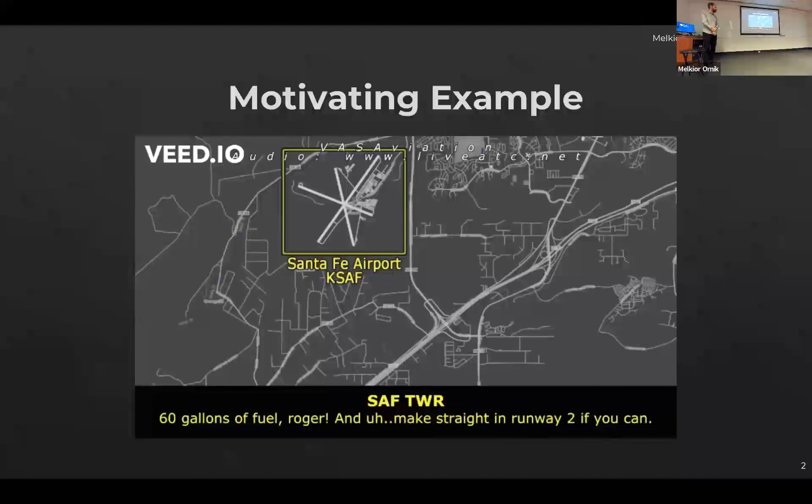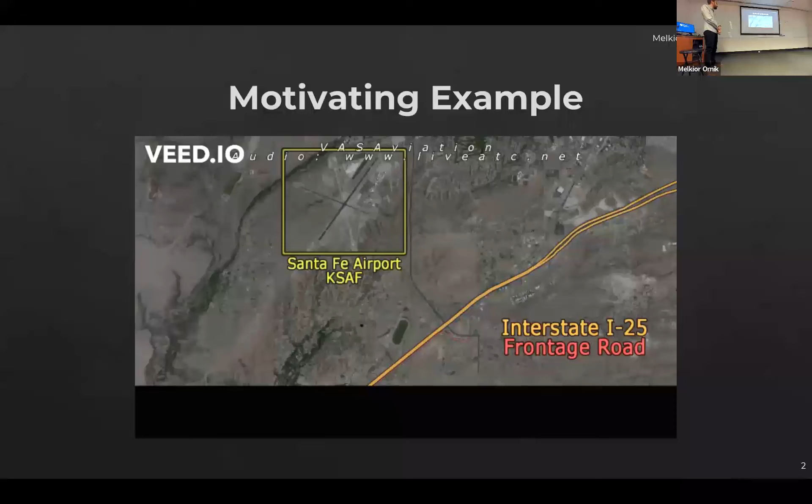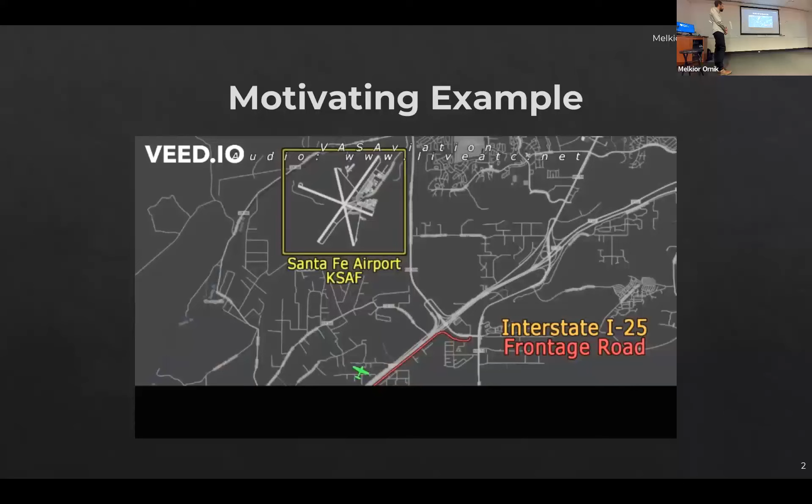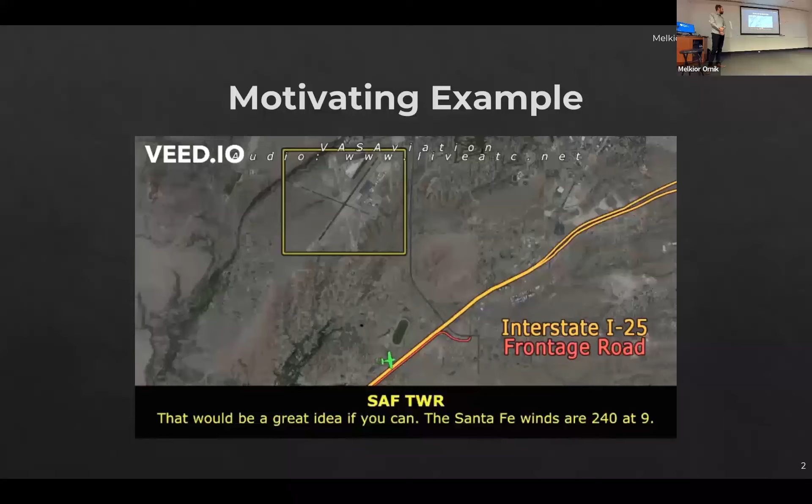6-8 Zulu, declare an emergency. Roger, you want to come in for runway 20? I don't know if we can get there. We just lost our engine power, something's happened. Wind is 230 at 10, you're clear to land any runway at Santa Fe, altimeter 3020. Can you give me some information? I'm 6 about south, I've got a big vibration going on, my prop's going bad here and I don't know what's going on. I've been at 8,500, I don't think I can clear, I don't think I can get to the runway. Make straight in for runway 2 if you can, but the wind is going to be a tailwind, 230 at 10. You can have any runway you want, clear to land. I don't know what's happened here, I have no oil pressure. Right on final for runway 2, you're 7 miles from the airport. I don't think I can get... I'm not going to make it. Let's see, where's our best place to go? I'm going to try to stay away from that ravine. Freeway? I-25 is in your vicinity, and maybe the frontage road off of I-25. There's 3025, I'm just not going to make that, I'm not going to make it. Can you tell me what's going on now? Try to land on the freeway here if I can. My engine, I have lost the engine, and I'll do the best I can here. Don't know if I should try to land on the freeway here or on the frontage road. I think I'll take the frontage road. That would be a great idea if you can. The Santa Fe winds are 240 at 9er. I've landed, I've landed.

So these last few seconds I put in just so you know the pilot is everyone's good. I promise you, throughout the talk I'll have a few more videos, and I promise no one died in the making of any of those videos. So you'll see it'll get weird - you'll need this caution.

So let's discuss what happened here. A pilot was planning to land at Santa Fe, and over time there seemed to be failures - one failure, and somehow these failures seem to be increasing. There are changes happening, and somewhere near the middle he decides he can't land at Santa Fe. He doesn't believe he can get there, so he starts looking for the next best option - he's like, okay, I'm going to try to stay away from this ravine. Then he chooses the interstate or the road next to the interstate, and manages to land there. So ultimately what we're talking about is he's trying to develop some sort of maximal understanding of his capabilities in the face of limited knowledge.

Some things broke - by the way, this was a tiny airplane, not a 737 - but some things broke. Some control surfaces were no longer operating, or in this case it was the engine. And he is trying to land safely.

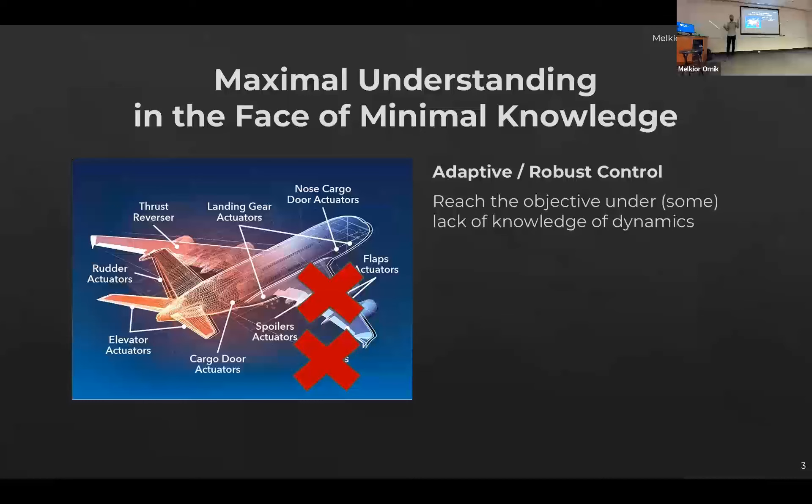This is not a new problem. If you look at the classical methods of adaptive control, of robust control, they try to figure out a control law that will reach the objective under some lack of knowledge of the system dynamics. But here's the thing - in this case, this was impossible, or at least the pilot believed it was impossible to reach this objective. This wasn't a question of can I figure out a control law that will allow me to land at Santa Fe, because there's a good chance there is no control law that will allow me to land at Santa Fe. I simply don't have the actuation capabilities to do so.

So the pilot intended to land at Santa Fe. Now this is no longer certain. So the pilot tried to figure out, okay, where do I think I definitely can land, possibly with the understanding that things might even be progressing towards getting worse over time. What are the guaranteed spots where I think I can definitely land? And so this is what the pilot did - he decided on what he figured was a reachable target, which was the frontage road, and then he planned how to get to that reachable target.

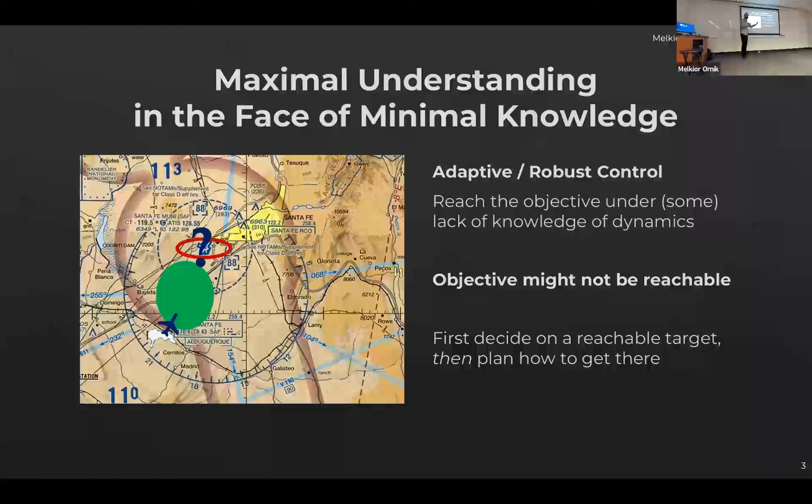This is the framework that I'm interested in developing - not just the framework of adaptation, but the framework of figuring out, faced with a partial lack of knowledge about dynamics, environment, whatever is going on, figuring out what are the things that I can guarantee I can complete, what are the missions that I definitely can pursue.

Mathematically, I think this abstract framework is applicable across domains. It could be in something like a network system, like a power grid, where some of your components fail and you want to see whether you can still ensure the performance of the overall system. Whether it's in a UAM, urban air mobility framework, where you might have some bad actors who are not following the particular rules or that suffer damage. We're right now working on a robotic example with a NASA grant with hardware called OWLAT, where we are playing with, hey, some parts of your robot fail - what are the capabilities that we can still complete? What are the missions that we can still complete given this failure and given our possible lack of knowledge about the failure?

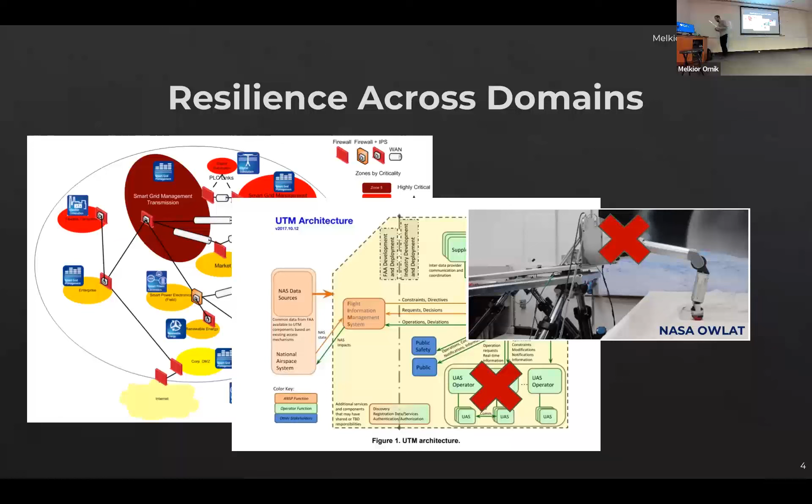So my entire talk is basically predicated on the claim that bad things, disasters, malfunctions, physical damage, hostile action will unavoidably occur for cyber-physical systems. No matter how much we try to protect these systems, eventually things will definitely go wrong. And once they go wrong, we might be interested in a few things.

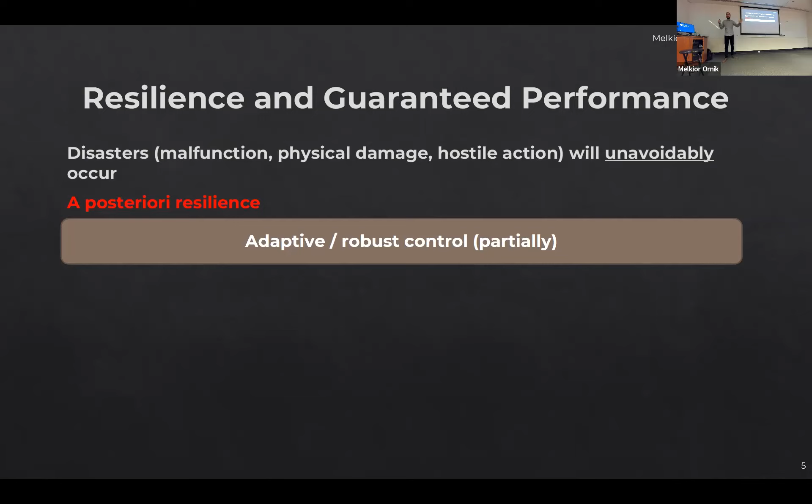The first question that I have is what I call a posteriori resilience. So when a disaster strikes, can I figure out a way to certifiably drive the system to complete its mission? This is not necessarily a new question - it's an interesting question, a classical question that is at least partially very well answered by adaptive control, by robust control. There's a bit of a question on certifiability of things - it depends on different methods, but this is something that's pretty standard.

I claim we should do more. I claim we should discuss a priori resilience. Can I design the system in such a way that after a wide class of adverse events, after a wide class of disasters, I know that I will be able to certifiably complete a wide class of missions? Now, the way I phrase this question, it's generally unlikely - if something happens to you that is so terrible that you can't really do anything, then yeah, you won't be able to complete any mission. So generally we can feel this is unlikely, but we're still willing to play with it.

And then the third thing, which the second thing leads us to, is guaranteed performance. So when a disaster strikes, can I, given my current partial, imperfect knowledge about what happened, determine what missions, what tasks the system is provably able to complete? So these are the things that are going to drive the rest of my talk.

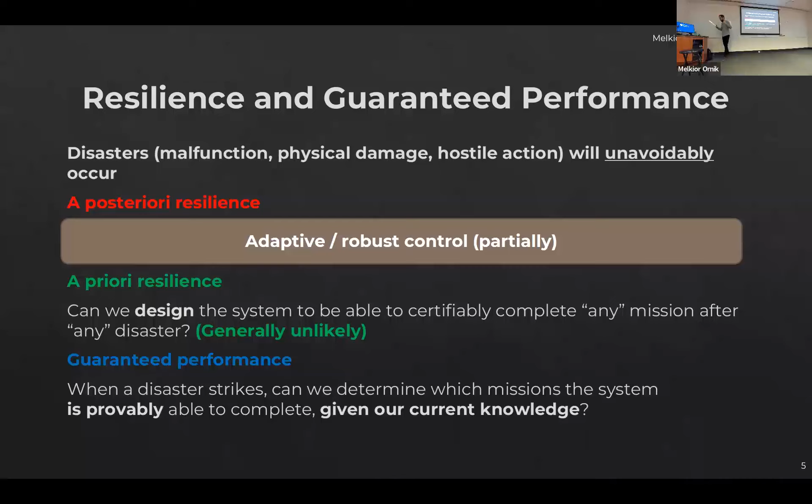And just to provide a mathematical framework of what I'm talking about - and of course all these things can be thought of in a variety of frameworks, discrete time, stochastic, whatever it is.

I'm going to keep to standard continuous time ODEs. I'm considering a system x dot equals f of x, u, where u is some sort of control input that lies in some set U, and x is the system state.

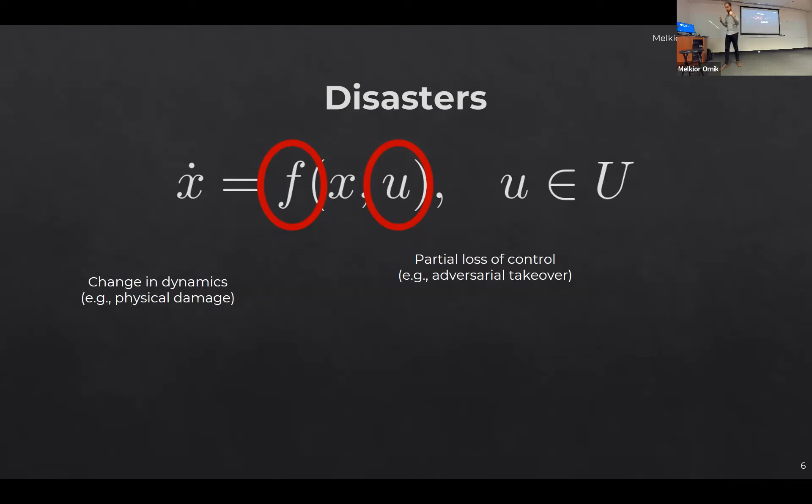I will be considering and possibly combining three classes of adverse events. One is change in dynamics: because of physical damage, my f is no longer f, it is something else. Class number two is partial loss of control. I used to have six actuators, and someone took over one of my actuators and might be plugging in bad inputs. This is a framework you could think of in terms of network control, if someone took over a part of your entire system, some of your components.

The third part I'll mention is actuator degradation. The dynamics are still the same, I still have control over my actuation capabilities, I just can't plug in some of the things I used to be able to plug in before.

So when we combine those three things, really this equation x dot equals f of x, u changes to x dot equals f hat. So f hat is the new dynamics, possibly partially unknown, of x, u, v, where u is now the part of the actuation capabilities that I still have control over, and v is the part that is possibly adversarial or random, call it whatever you want. And u and v together now live in this degraded set of possible inputs, which is U hat.

I'll be continuing with these kinds of models throughout the talk, and I'll start going from right to left, from seemingly less difficult cases to more difficult cases as I discuss these possible disasters.

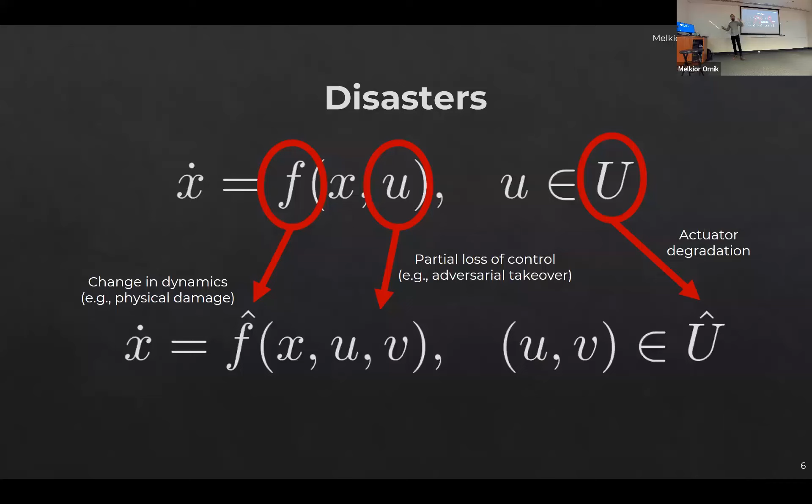So let's start with actuator degradation, and provide a motivation that's not to do with airplanes or things like that. I found this on a sailing forum where a person described exactly the situation I care about. The rudder on his sailboat is supposed to be able to go left and right, but it's somehow bent and jammed, so it can't go to the right anymore, or at least not as much as it was able to go.

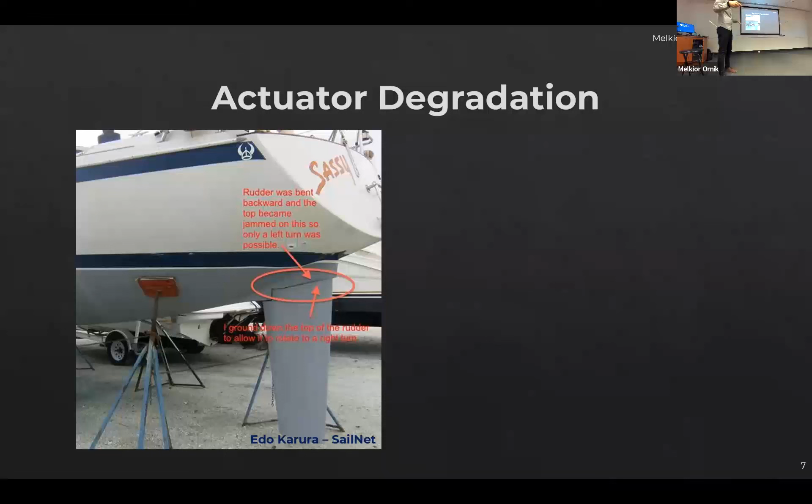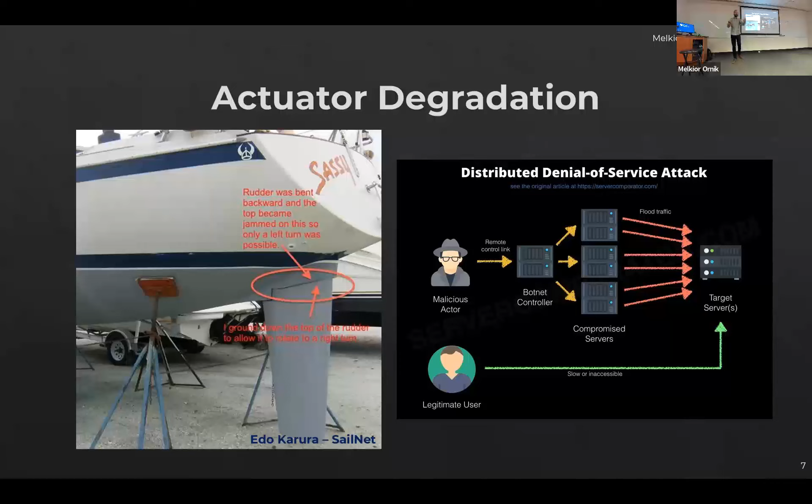He can still control the rudder, he just can't control it to the extent he was able to before. You could imagine such things in cyberspace, where you could have a denial of service attack, where because your bandwidth is taken over, or part of your bandwidth is taken over by an adversarial actor, you have less capability to respond in some way.

So in such a case, we have x dot equals f of x, u. The dynamics didn't change, everything is still the same, it's just that u is now in this U hat. I'm interested to answer the question: what are the missions that I can complete? And the easiest of those is, what are the states that I can reach?

In theory this is a simple question. If my dynamics are fully known, and I have some bound on the degraded actuator limits, or I know the exact degraded actuator limits, then the reachable set can be under-approximated by computing the reachable set for this system with the under-approximated actuator limits.

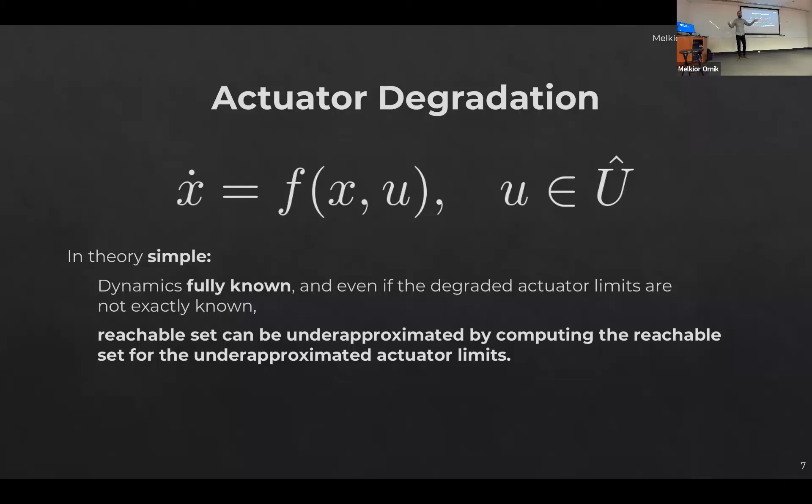And now we are happy. Of course, we are entirely unhappy. In practice, reachable sets of even fully known nonlinear systems are not computable in real time—even not in real time is difficult. And in particular, we care about things that are provably in this reachable set, so meaningful under-approximations.

That's difficult. What people often do in advance is compute what they call an operational envelope for the nominal system. This is some sort of stand-in for the reachable set, obtained through exhaustive testing or whatever it is, computed through years of design, simulation, and testing. So this is not something we can do online and on the fly. However, we are in a good situation here because our new system is essentially the same as the old system.

It's just that the actuator limits have been degraded. So we can assume that we know this reachable set for the old system, or operational envelope, for the nominal system, and we know a bound on the degradation. So our computation of the degraded reachable set shouldn't start from scratch. We know that there's some sort of a relationship between the old reachable set and the new reachable set. And so, to kind of formally...

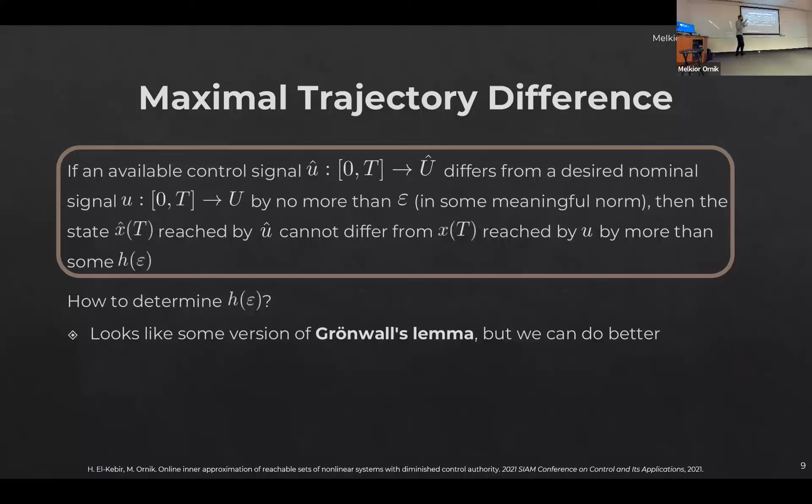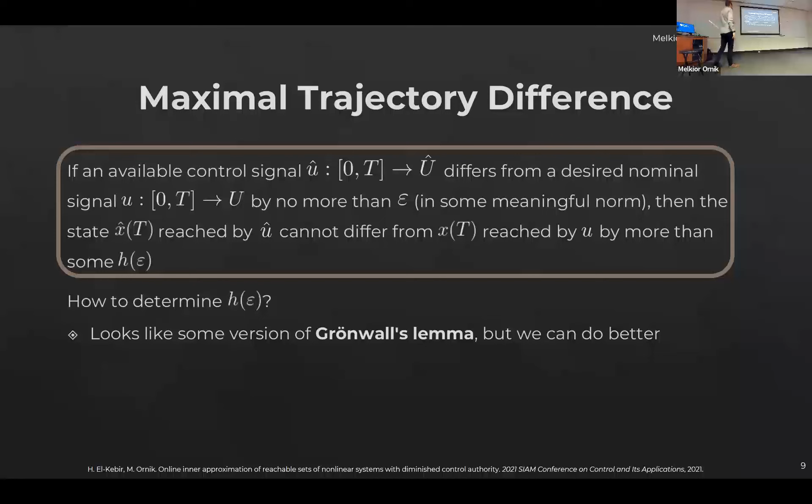This kind of looks like Gronwall's lemma, right? The difference in the dynamics generated by the two control laws—if we can somehow bound them, then Gronwall's lemma should give us, over time, some sort of difference or error distance between the two trajectories. Turns out we can do slightly better using something called the Bihari inequality. So if we know that the system dynamics satisfy some generalized version of the Lipschitz property, then we can bound the difference between the two trajectories using some sort of integral inequality.

My point is, I'm not going to go deeply into this. This is a more general version of Gronwall's lemma.

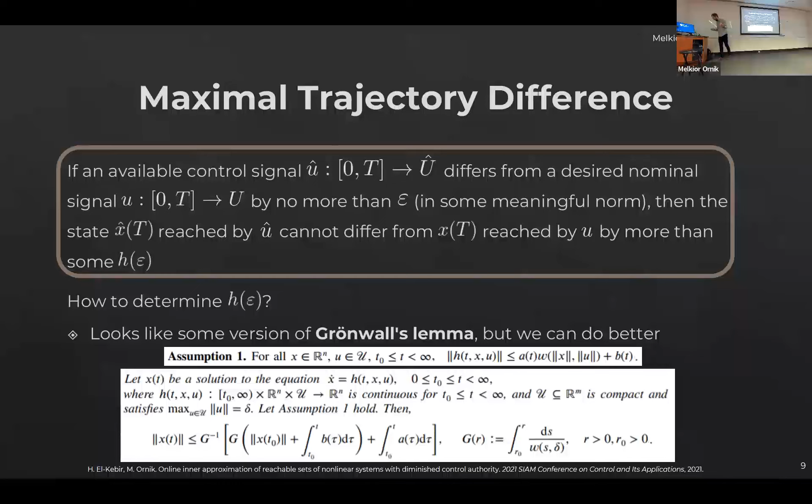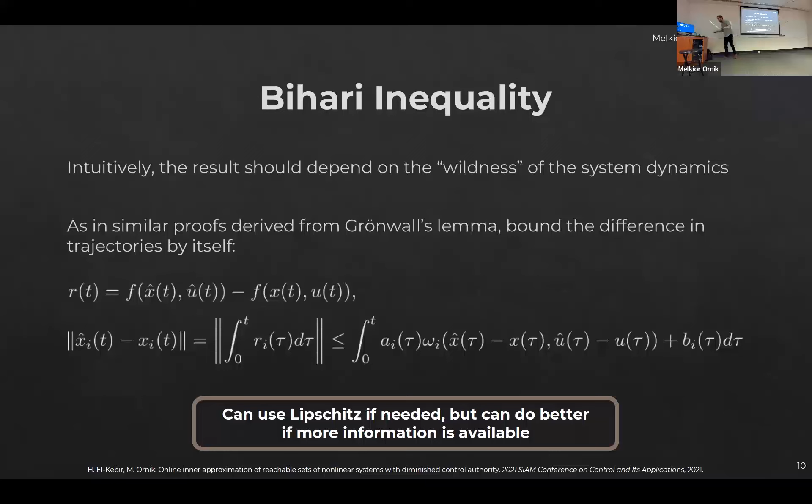Intuitively, this result should depend on the wildness of the system dynamics. If the dynamics are very tame, then a small change in the control input should not cause a large change in the trajectories. On the other hand, if the dynamics are very wild, the difference could grow very quickly. The proof is similar to the Gronwall lemma proof, where we try to bound this difference between the new dynamics and the old dynamics using some sort of Lipschitz property. It's just that we can do a bit better than Lipschitz. We can do Lipschitz if needed, and we can do better if more information is available.

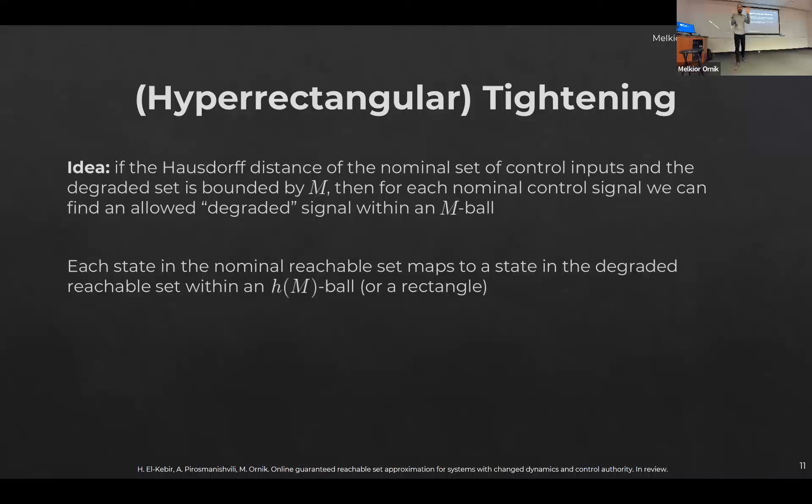So the idea now, using this theory, is that if the Hausdorff distance of the nominal set of control inputs and the degraded set is bounded by m, that means, by definition, that for every nominal control signal I can find an allowed degraded signal within an m-ball. Each state in the nominal reachable set then has an analog, or a twin if you want to call it, in the degraded reachable set that is within the ball of size h of m. And we can do somewhat better—it doesn't have to be a ball, we can do it separately on all the coordinates. It can be a rectangle, but this is the idea.

So if my old reachable set is the gray, that means that for every gray point there exists a red point—red being the new reachable set—that's within some sort of a rectangle centered at the gray point. So for every gray point, I can get a red point.

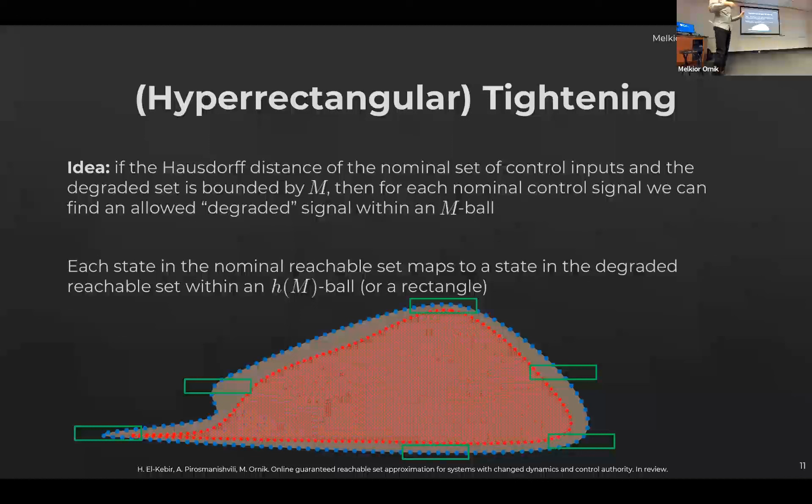Now there's still a little bit missing, so I'm still lying a little bit here. We have an idea of what these red points are, but currently it's just a point cloud. We don't have proof that everything in between is also reachable. Technically, a lot of these gray points could just map to the same red point. So we fix that by showing that any state in the boundary of the degraded reachable set maps to a nearby state on the boundary of the nominal reachable set. For every state in the boundary of the red, there's a state in the boundary of the gray that's close to it. This is how we fill the blanks.

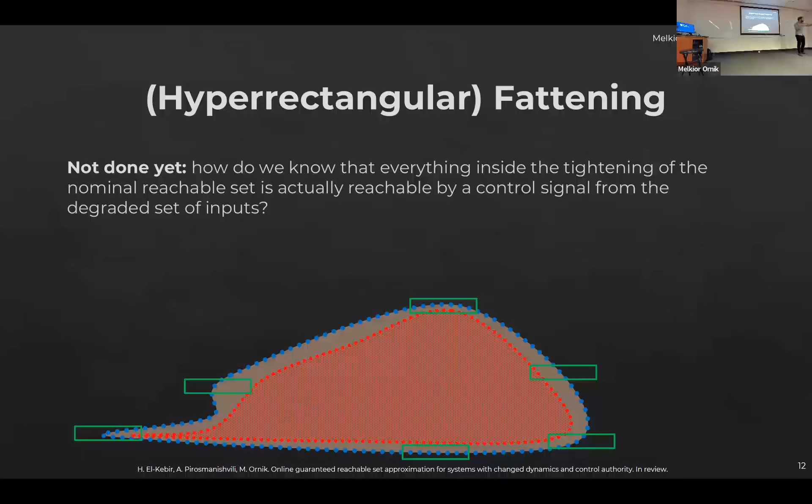You're currently not making any assumptions on how this mapping is happening, right? You're not saying you're mapping to the closest possible point. No, I'm just saying there exists a point. For every gray, there exists a red. This is a very interesting question, and something we're currently working on is, okay, what do I actually do with this? How do I determine that point? And how do I figure out the control law that's actually going to drive me to that point? That's a far harder thing. But right now, I'm just saying, okay, I know what I can do. I don't know how to do it yet.

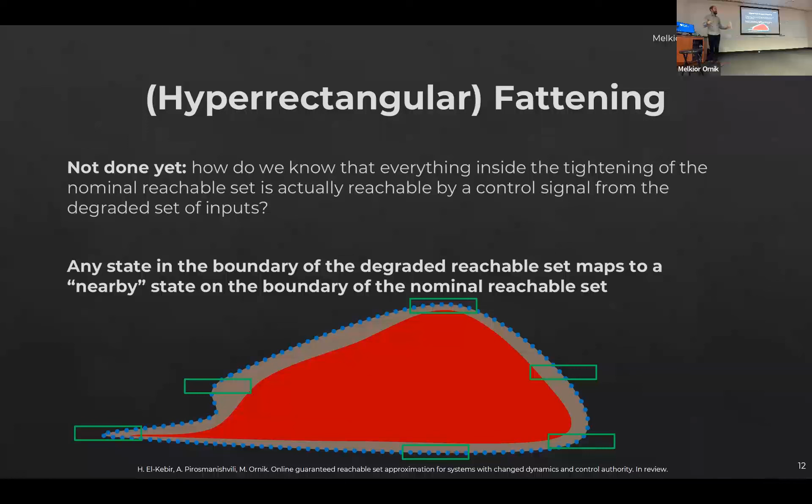Okay, so to show you that this does work, at least on some reasonable example, I'll provide an example using the Norrbin's ship model. Yes, my student was inspired by that picture of the rudder. Anyway, the original reachable set of the system is this thing in blue. Now, the degraded reachable set is red, or whatever this is. We provide an under approximation for this degraded reachable set.

We don't hit everything, so what we get, which is in green, is smaller than the degraded reachable set. But at least it's a decent under approximation. It's not like we under approximated a big thing with just one point. Of course, these under approximations get worse over time. And so, unless we have very good bounds or something significantly better than Lipschitz, as time progresses, asymptotically the approximations will get worse and worse.

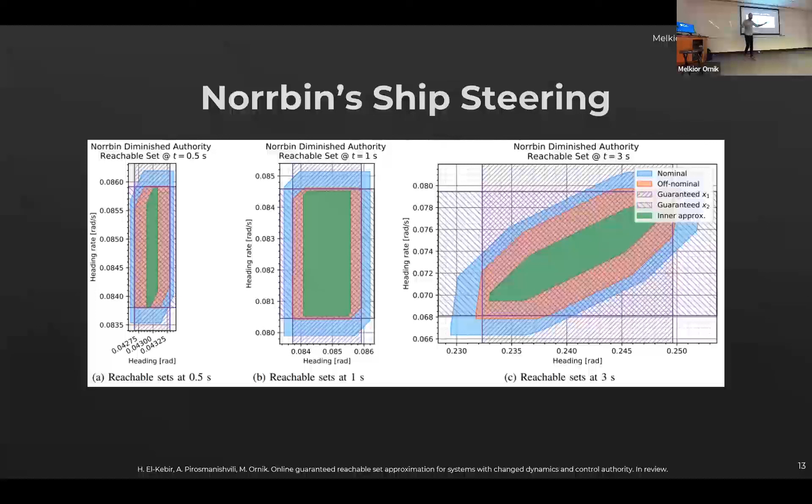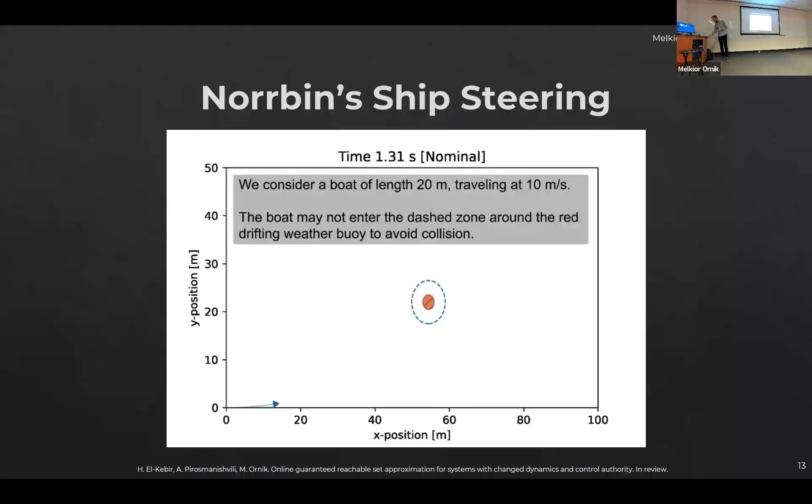And so we can do this for short maneuvers, and this is what I will actually do. I'll consider a boat that is traveling from here and trying to get somewhere here. There's an unsafe set around some rock or buoy, marked by this circle. The boat originally plans a course that takes it to its destination while not touching the unsafe set. Sadly for the boat, it originally comes pretty close to the unsafe set. That's what we need for dramatic tension.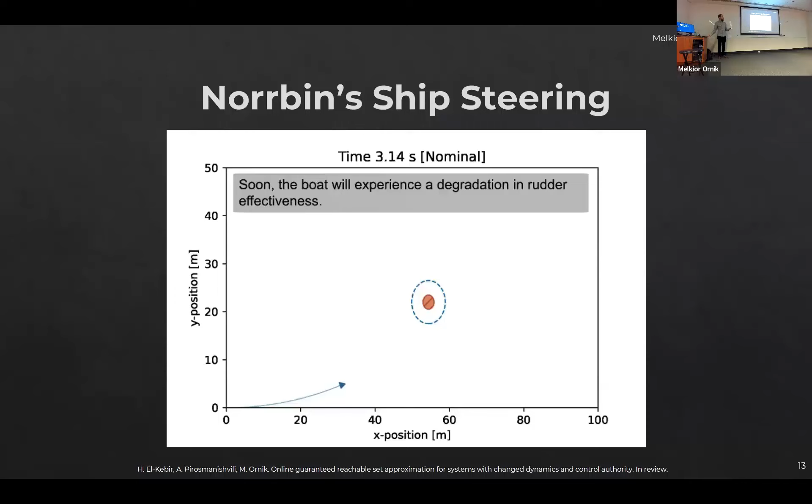And even more sadly for the boat, it will suffer damage that partially degrades its capabilities right about now. So at this point, the boat has degraded capabilities. What we care about is figuring out whether there exists a part of the reachable set that is outside of the blue circle. If everything in this under approximated reachable set is inside the blue circle, then we have no guarantee that we will not smash into the rocks, and maybe the best thing to do is just jump out or call for help.

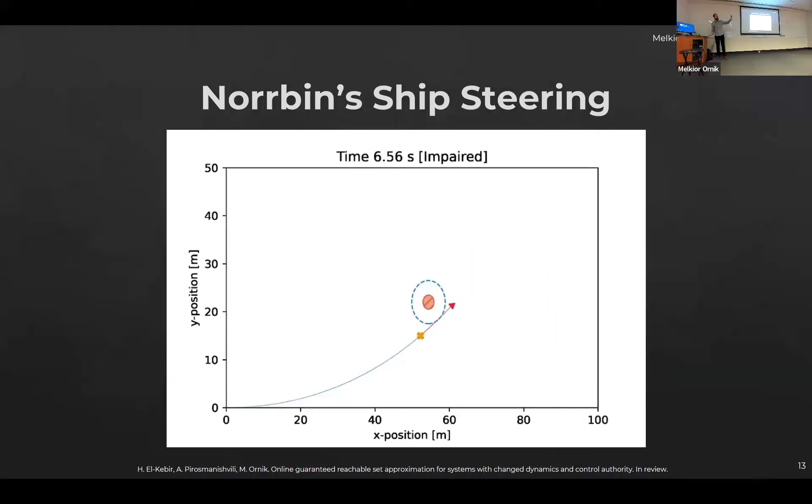In this case, and this will show itself now more, we can show that there does exist some part of the reachable set that is outside of the buoy, or outside of this prohibited set, and so the boat continues.

Now, I want to be very clear here, because sometimes I sell this slide by not mentioning what I'm going to mention now, but you seem like a very concerned audience. So how did I come up with this control law? Yeah, that's a lie, right? Or it's not a lie, but right now this is done by hand. We just know that the control law exists. My theory guarantees that the control law exists. And then we can start playing with trying to design this control law. This is what my student did, and we designed the control law.

Of course, down the line, you care about this second part as well: how do I figure out how to actually escape from this buoy, not just whether there is a way.

Isn't it possible to compute the possible trajectories up to a planning horizon and then choose one that's safe?

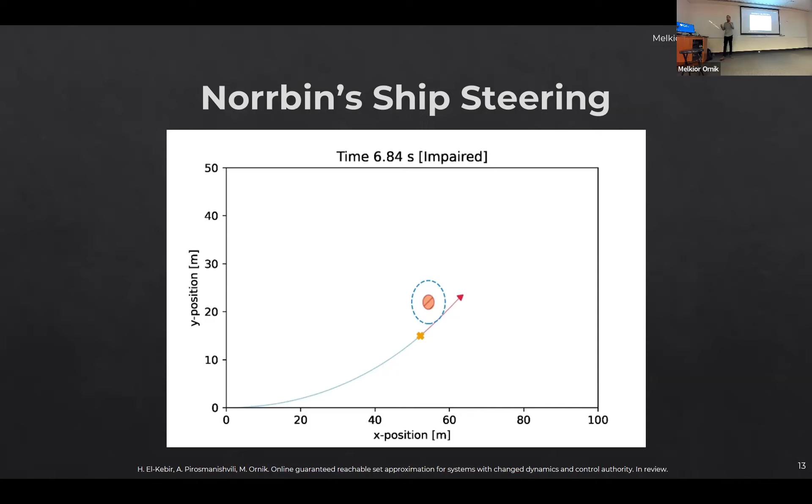Well, yes but no. If we were working with discrete time, you could do that using a decision tree of every possible option, giving all possible trajectories. But I'm not working with discrete time, and over a longer planning horizon this would computationally kill you even in a discrete sense. Your question is a good one though, it's equivalent to finding a reachable set, which for nonlinear systems in continuous time is difficult. So yes, it's a natural way to go, and that's what we're trying to do.

Okay, so let's say I sold you on this actuator degradation thing. Let's go into the second part, where it's not just that the actuator is degraded, it's that I no longer control the actual actuator. I have a video here, let me play it.

Left to right, the Stealth F-117, ladies and gentlemen.

Again, I promise no one died. You look very concerned about this. The pilot jumped out, the airplane obviously did not live past this. What I want to mention is you can see in the last part of the video, in slow motion, maybe let me play it once again.

There's an oscillation that at first is kind of natural, and perfectly allowed, because that's part of the airplane's control surface, an elevon. But this, because of mechanical failure, this oscillation is not actually caused by the pilot. My understanding is that there was some sort of screw issue, and the elevon started operating on its own, kind of randomly. The pilot clearly was not able to cancel out this undesirable actuation, and over time that led to disaster.

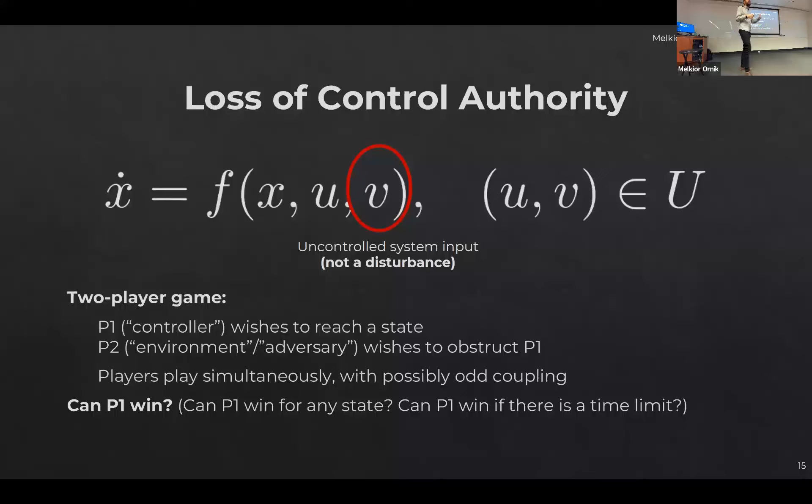So the questions are: can P1 win for any state where it wants to go? Can P1 win if there's a time limit? All of these things. The intuition is this.

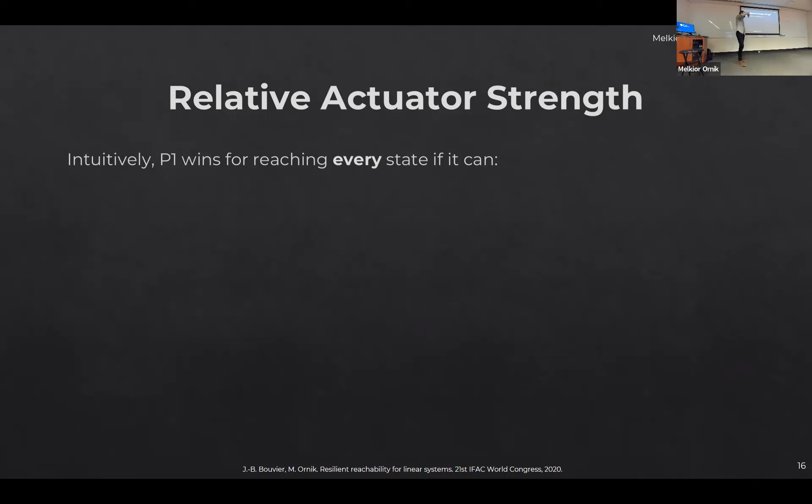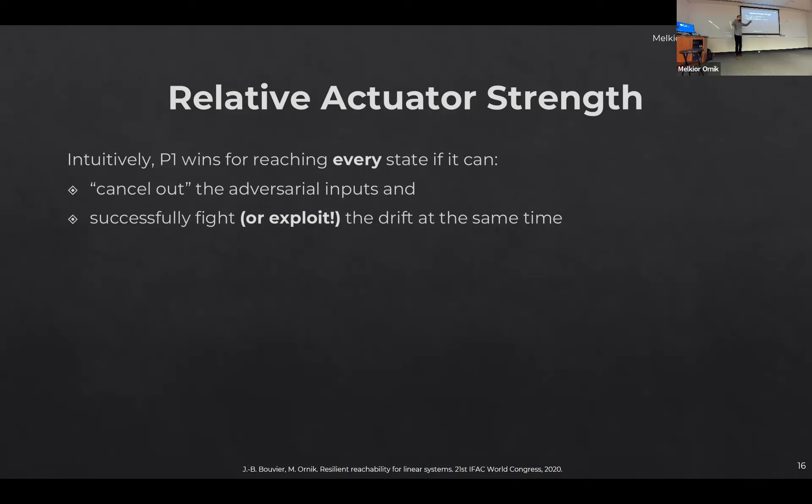The intuition is kind of given by what I was saying when we were looking at that video. I said the pilot was incapable, or didn't cancel out this bad actuation. So intuitively, player one wins if player one can cancel out, in some sense, the adversarial inputs and still retain some useful control capability in order to fight or exploit the drift.

So still do something meaningful after canceling out this bad input. Now, for linear systems, and I'm mentioning this for the sake of mathematical curiosity, fighting the drift, if you have a bounded input set, is impossible, because if the drift pushes the state towards infinity or towards zero, if you're far enough from zero, the drift will be stronger than you no matter what. So this gives rise to some sort of conditions on basically the eigenvalues needing to be zero.

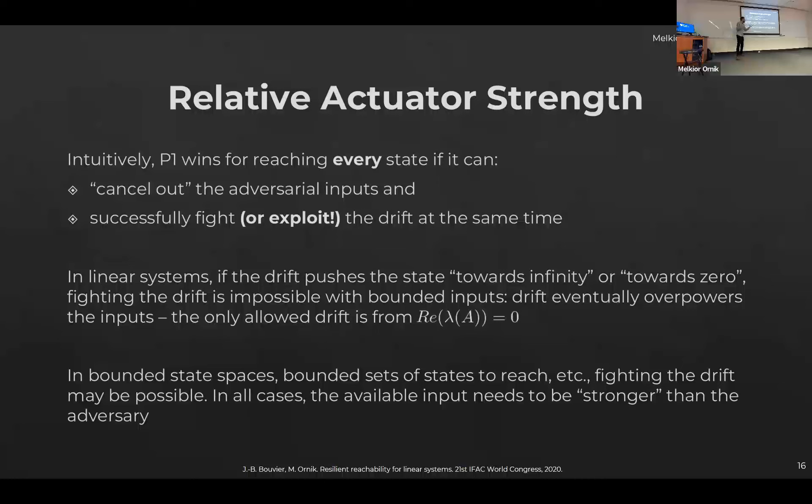But of course, we are often not interested in unbounded states. We are interested in some sort of bounded state spaces, bounded sets of states to reach. And in that case, fighting the drift may potentially be possible. In all cases, the intuition still holds that the available input needs to be in some sense stronger than the adversary. That's the idea. So in a formal setting, I'll introduce this for linear systems.

If my original system equation is x dot equals Ax plus B-bar u-bar, how I will model this loss of authority is B-bar splits into two submatrices, B and C. B is the submatrix that denotes the effects of my continued control inputs. C is the effects of the bad control inputs, the adversary's control inputs.

Then the notion of available input being stronger than the adversary is almost the same as saying zero is in the interior of this set. What I mean by that is, for everything that the adversary does, there exists a U which will cancel out whatever the adversary does, and slightly stronger than that, that's why I need this notion of interior. So I can cancel things out, and I can also have some small actuation that I'm still able to perform.

Okay, so we have some ideas on evaluating necessary, sufficient, whatever you want, conditions on evaluating this resilience to the loss of authority. Now the question I want to pose is, how resilient is a system?

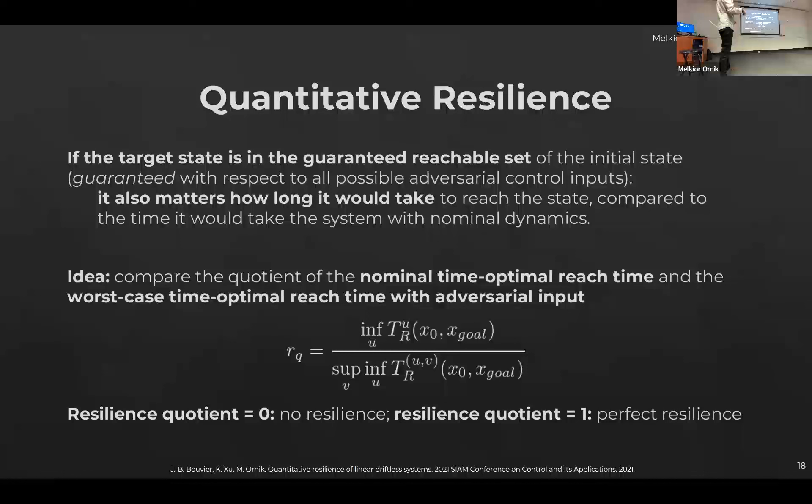So, okay, I figured this out—or okay, I'm lying, my student figured this out—for this. What happens for driftless systems and integrators? But okay, those are pretty trivial systems, right? At least show us some linear systems.

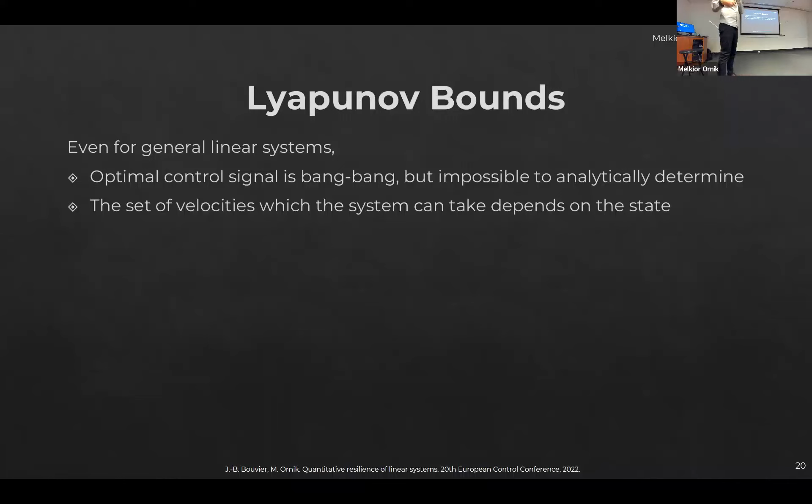Well, for linear systems, it's already really hard. Even for general linear systems, the optimal control signal is known to be bang-bang—this is a classical result—but it's impossible to analytically determine, since the set of velocities the system can take depends on the state. So the idea there is, let's try to get some bounds on this quantitative resilience.

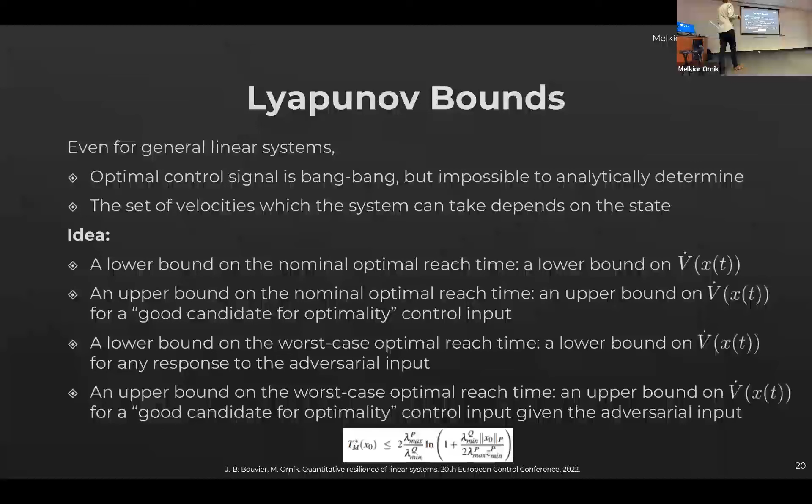The big idea is to use Lyapunov functions for those bounds. We get a lower bound on the nominal optimal reach time by getting a lower bound on the flow of the Lyapunov function for a linear system, and an upper bound by getting an upper bound on this flow for a good candidate for optimality—we plug in something we think should work well. In practice, what we plug in is whatever control input points most towards the goal, and we get some bounds. We do the same thing for the adversarial inputs, so we get bounds on these optimal reach times and on the adversarial reach times. Using these bounds, we can go back to the original problem.

We take a model of an academic fighter jet called ADMIRE, with four control surfaces, and we can ask: is the system resilient to the loss of any one of these surfaces? What we want to see ultimately is, could the pilot have done something differently so that, if they played their cards exactly right, they could have survived? In this particular framework, the resilience ends up being connected to the eigenvalues of a particular matrix. It turns out the system is resilient to the loss of one of these control surfaces, but it is not resilient to the loss of the right elevon.

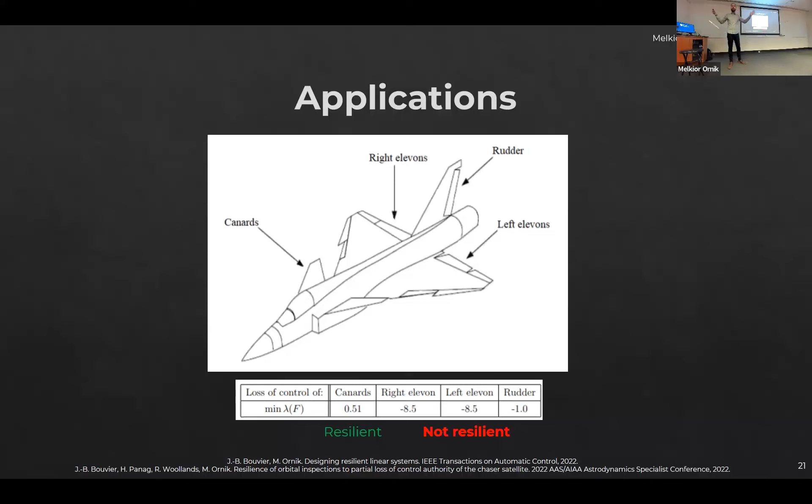So what we are saying is that if the environment operated in exactly the worst way, which it probably didn't, indeed the best thing the pilot could have done is what they did, which is jump out.

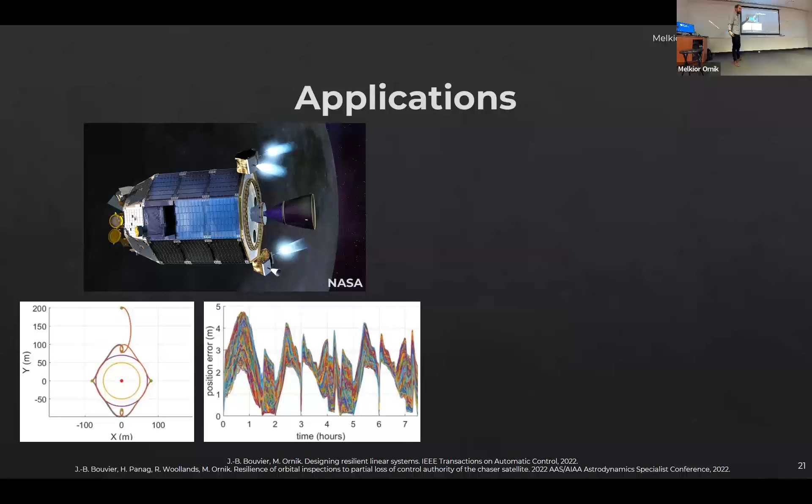And so we built this on further applications where we're trying to have now resilient trajectory tracking, so not just reachability for a multi-thrust spacecraft.

Also something that I'm really interested in is kind of being a dictator. So opinion dynamics, trying to figure out if I'm in control of all of my broadcasting media, but I lose control of one of them, can I still get people to think what I want them to think? Clearly, I'm a person with many interests in these fields of manipulating people.

So let me go to the third case now. We went from actuator degradation, partial loss of control. Let's go to something most extreme now, actual change in dynamics. So I now have x dot equals f question mark of xu, where this f question mark is an unknown function. It's not a disturbance, it's not just finitely many unknown parameters. It is an unknown function.

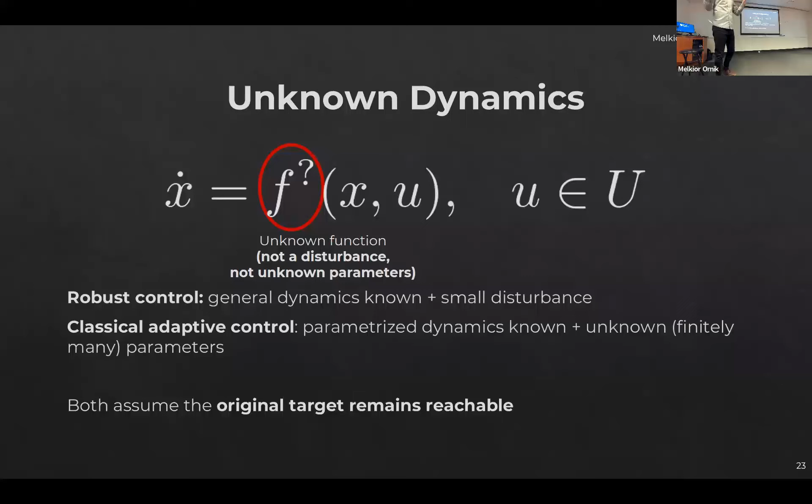Interestingly, or not interestingly, classically robust and adaptive control - and I don't want it to seem like I'm bashing these two things, they're very useful and we use them - but they classically assume that the original target remains reachable. And what we care about is figuring out what makes it... saw this before, you should have... figuring out what is reachable. So, motivation.

You're wondering how that person survived. These were radio control things. I think that this was on purpose, so otherwise it would have been very difficult.

So what we have now is a change in dynamics. After one airplane crashed into another, it changed its physical properties substantially. The system can almost certainly not use the same control law to reach its target. It also may not be able to reach its original target using any control.

So what we care about is what is the system certifiably capable of doing, even if we don't yet know how. Can we somehow guarantee that, hey, I am able to reach this runway? Then I'll think about how do I reach the runway.

So first of all, the answer generally is no, right? If I don't know anything about the system dynamics, if anything can happen in the next second, then obviously I'm not able to provide any guarantees whatsoever, right? I can't get anything out of nothing.

But more generally, I can define something that I call - I'm interested here in reachability - the guaranteed reachable set. So if I'm at x0 right now, and I have the set of all the dynamics that are consistent with the current knowledge, so all possible truths, I can compute the reachable set for every possible truth. I can intersect these reachable sets, and certainly what is in the intersection is guaranteed to be reachable by every possible true dynamic. So I can at least write this down.

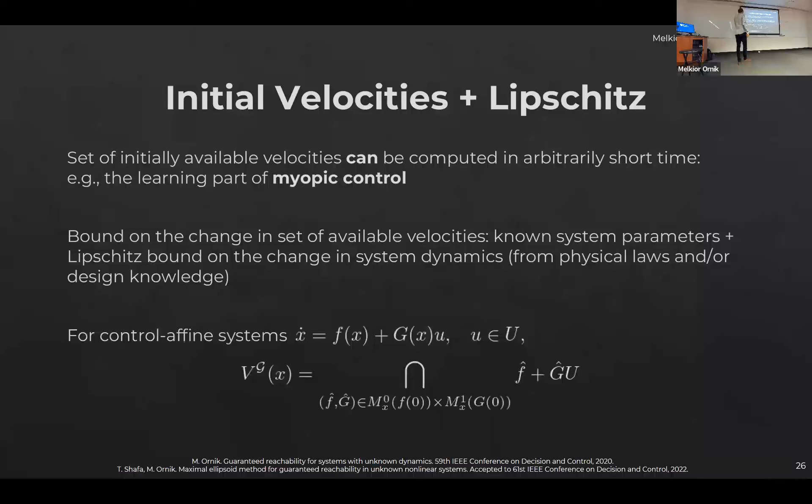So we do have some side information. For control affine systems, it turns out that this set of guaranteed velocities at state X is an intersection of all the possible, infinitely many, particularly parameterized, translated, dilated, rotated copies of the same object.

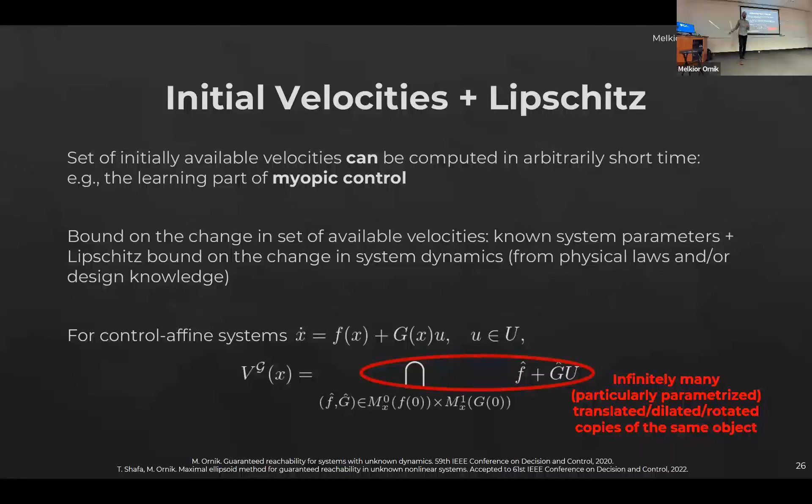So modulo something squished with the Lipschitz bound, whatever it is, this is still a weird thing—it's an intersection of infinitely many objects. The initial idea is to put a maximal ball in there.

That will tell you at least some velocities that are guaranteed at every time, and then propagate this ball and propagate the trajectories using it. We can do smarter things—fit a more complicated object, but still geometrically simple: polygon, ellipsoid, whatever it is.

We can get a guaranteed reachable set as the reachable set of a simple control system or ordinary differential equation, where at every time the available velocities are a ball or ellipse or whatever it is. And in practice, that works, at least over short time.

This is something we've been playing with, a model of a quadcopter. If you look at the true reachable set, it's blue. Of course, we don't have perfect knowledge of the dynamics, so it's not possible for us to figure out the true reachable set.

This is not a computational issue—I just don't have the dynamics to figure it out. But I am able to figure out some sort of an under-approximation. I have two methods here: one using the ball, and the other using a polygon.

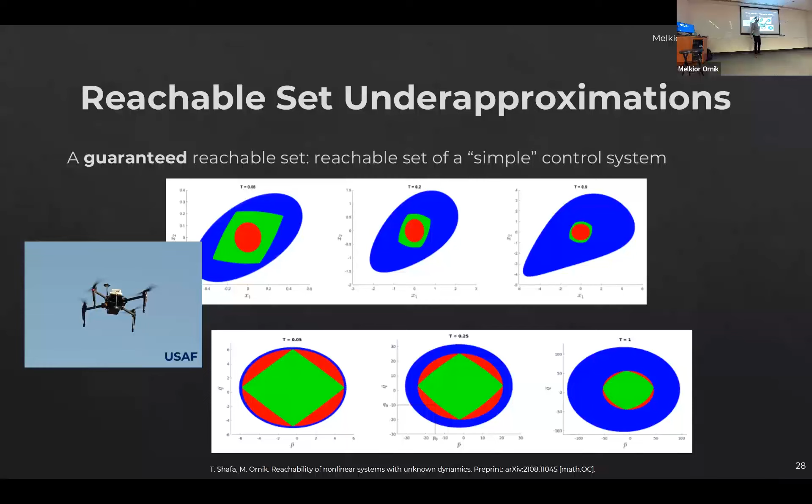As time progresses, these approximations get worse, but at least over a short time, I'm able to do it.

Okay, I'm done with all three of these things. Hopefully I convinced you that there is meaningful work done in all three of these things. I still think there's a lot of meaningful work to be done in all three. So this is what I want to end my last few minutes on—we only just started.

We have a lot of technical assumptions that we make. We say that in the case of loss of control authority, systems are linear—we're wrapping that up now. We're assuming some sort of full actuation, kind of a technical assumption we have there.

That's perhaps less interesting. More interestingly, we can be smarter. We should be able to use some structural knowledge of the undamaged part in unknown dynamics, not just say 'what I have now plus Lipschitz.' There are parts of these dynamics that are possibly unchanged—I should be able to exploit them.

Second, I need to be able to talk about not only what can be reached, but how to reach it. So after figuring out this guaranteed reachable set, I want to use some robust, myopic, adaptive methods that will allow me to actually reach what I'm planning to reach.

Third, I shouldn't care just about reachability, right? If nothing else, I should care about some sort of safe reachability—reach a state while avoiding obstacles. At the very least, I should do that.

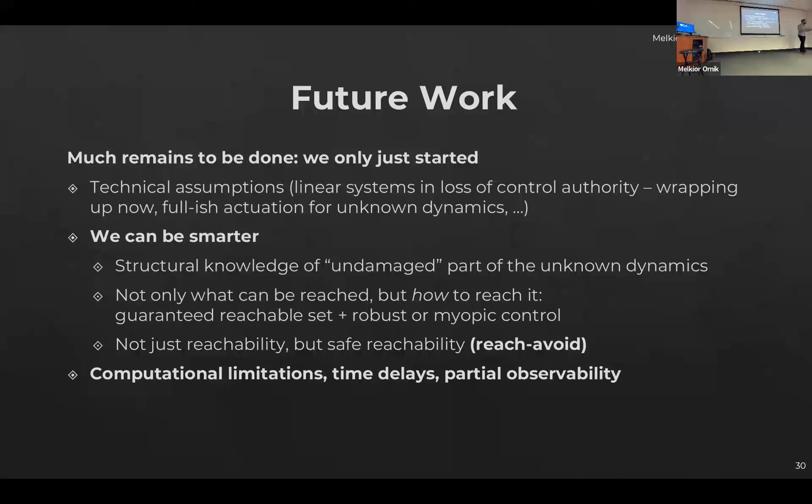Of course, there's computational limitations to what we do. There's time delays that we mentioned—how can I see immediately what my opponent did? There's also partial observability. I can't see my entire state, especially if there's been damage and there's some damage in my sensing. We already started with the time delays.

Delays hurt a lot. It turns out that as long as you have a non-zero delay in figuring out what your opponent can do, you can never perfectly cancel out the opponent. And so as we have this trajectory tracking, it kind of gets worse and worse over time.

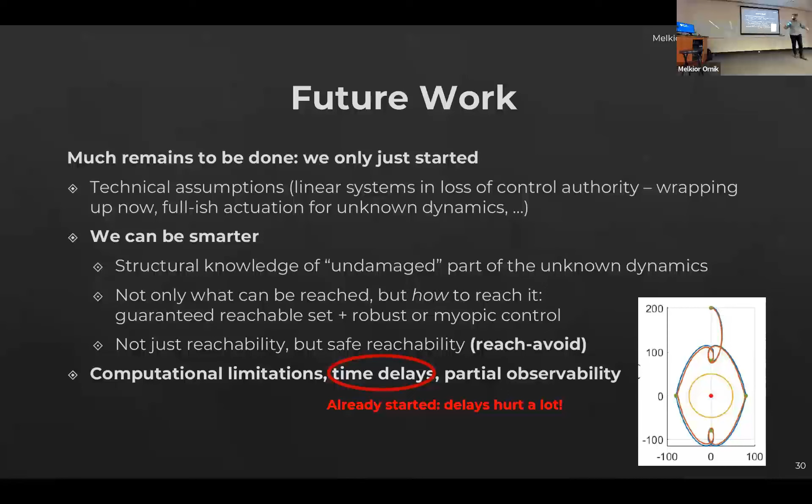This provably gets worse and worse over time. So my medium-term goals here are basically developing these capabilities further. I'm interested in combining these scenarios, and I'm interested in building a whole pipeline of end-to-end planning, learning, and control.

So I mostly talked about the first part, task assignment: what task can be provably completed? Then there's the second part: what do I need to know in order to gather the information that will allow me to complete this task? And then there's the third part, assured control: actually complete this task, collect the information, and complete the task. I'm interested in more physics-based and design-based results, so exploitation of significant prior knowledge for better estimation.

Long-term goals, I haven't even started talking about sensing. We want to use sensors and perception to recognize the fault type, something we kind of recognize right now—hey, this actuator is not functioning. We want to do that using sensors and perception. We want to gather information, and ultimately this goes to fault detection work, sensor fusion work, and state estimation. We want to do more complex missions, right?

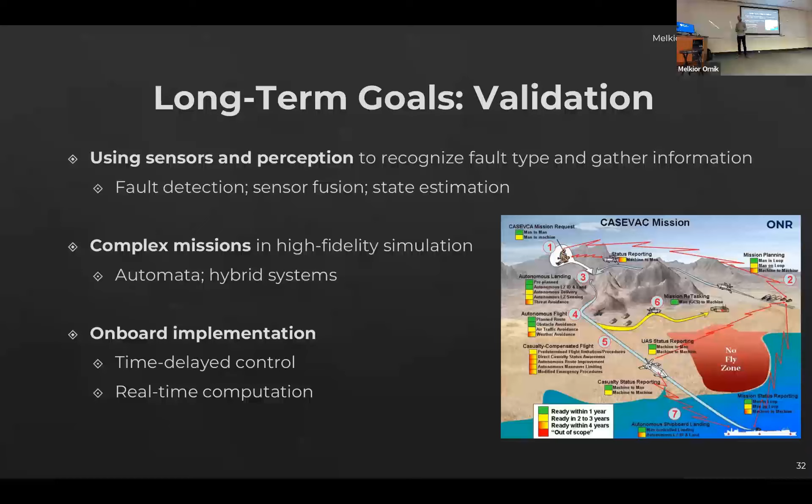I don't just care about reaching a particular state, this is just a small maneuver. I might care about longer missions in high fidelity simulations. And ultimately that leads to automata and hybrid systems, because oftentimes different parts of the mission will be driven by different regimes of operations. And in the end, I care about onboard implementation. So whenever I implement something on board, I will have significant limits to real-time computation, and I will have time-delayed sensing, time-delayed control. All computations will take time. I'll need to care about that.

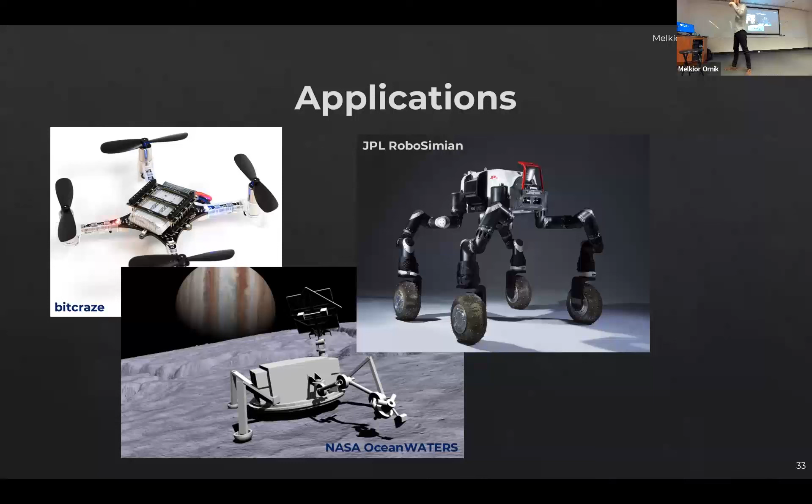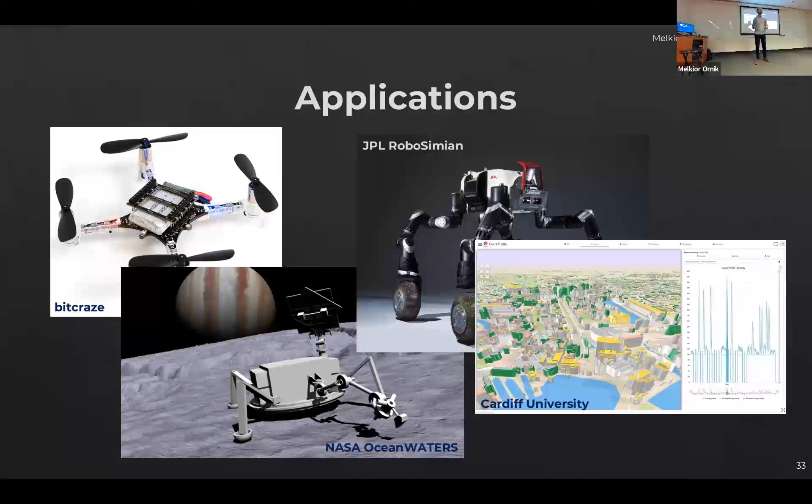I believe that the applications of this can go across domains, and that's why I'm really excited to talk to people throughout the GRASP lab and throughout UPenn. So we've been playing a little bit with a UAV. We're also playing with a simulator of an extraterrestrial lander, which is NASA OceanWATERS. We're playing with the RoboSimian, which is a physical hardware robot, and we're also interested in moving past the single vehicle, single autonomous system framework into something like power grid, cyber security, cyber networks, things like that.

To summarize, if there's a few sentences I want you to come away with from this talk: first, dealing with abrupt mid-mission events is crucial for emerging autonomy in challenging environments. We need to figure out how to deal with bad things happening. Classical robustness and adaptation are great things, but I claim they are not enough. We need task assignment, and we need assured resilience.

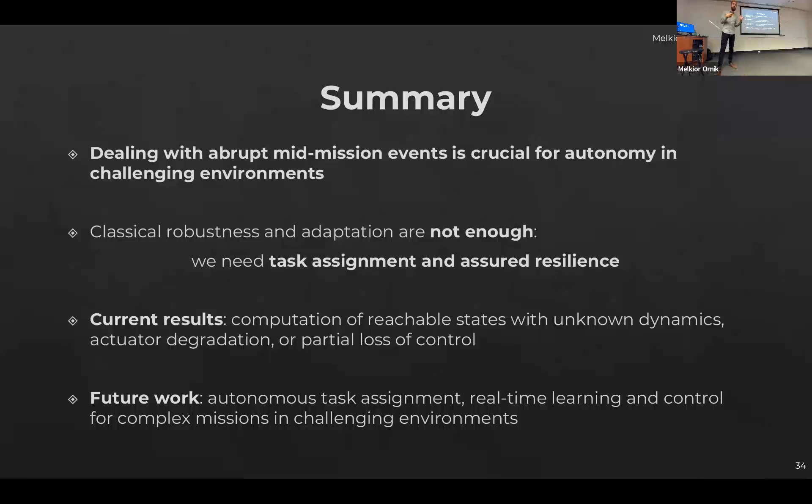Our current results compute reachable states in all kinds of scenarios: unknown dynamics, actuator degradation, partial loss of control. Again, this is not enough. What we need is an autonomous pipeline of task assignment, real-time learning, and control to accomplish challenging missions in complex environments.

I acknowledge NASA, who gave me money for this, and the Air Force and the Discovery Partners Institute in Illinois. And most of all, I acknowledge my students.

The work on actuator degradation is led by my PhD student, Hamza El-Kebir, with also some work by our previous undergrad, Melkior. The work on partial loss of control is led by my, sadly, soon to be graduating student Jean-Baptiste Bouvier, and Kathleen Shu, who was an undergrad with us and is now at MIT. And the work on unknown dynamics is led by my PhD student, Taha Shafa.

Thank you. I would be so happy to talk to you about anything and everything, whether it's related to this or anything else in control, cheesesteaks, or whatever it is. I'm really excited to talk. Thank you.

Yes, I guess I have one question. You said for the delayed case, what you're currently working on, that it's not possible to get guarantees. Yeah, on how—not that it's not possible to get guarantees—it is not possible to assure that you can exactly reach and stay at a desired state. And if you think about it, that's because think about that last mile just before you reach the desired state. You have this last time during which the opponent can always screw you up.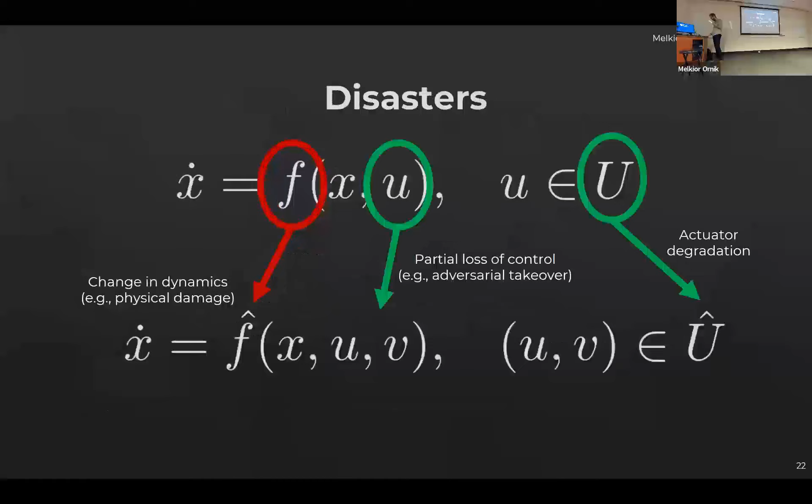Let me just see, is it the part where I said 0 is in the interior of something? So I guess the question you're getting at is, do I... First of all, this is not in the system state. It's related to the system state, but it's really kind of in velocity space. If we were working on manifolds, it would be some sort of tangent.

What I guess you're getting at, and this is an interesting question, is what if I don't care about not being resilient to some part of these dynamics? What if I only care about reachability in the output space rather than the state space, where the output is some coordinates or some function of state? I think this is really interesting. We have this more applied paper on spacecraft where they care about specific outputs, but we have not developed the theory for this.

I think this would be really interesting, because oftentimes you might not be resilient to things, or you might not know a part of your dynamics, but you might not care about part of the dynamics anyways.

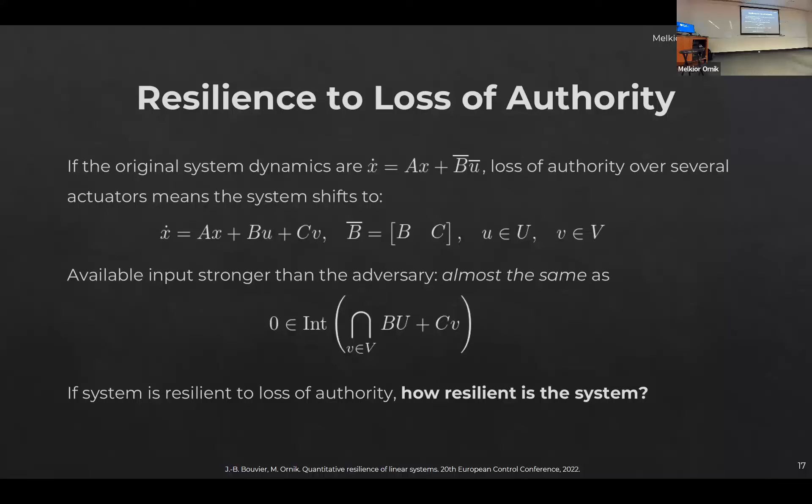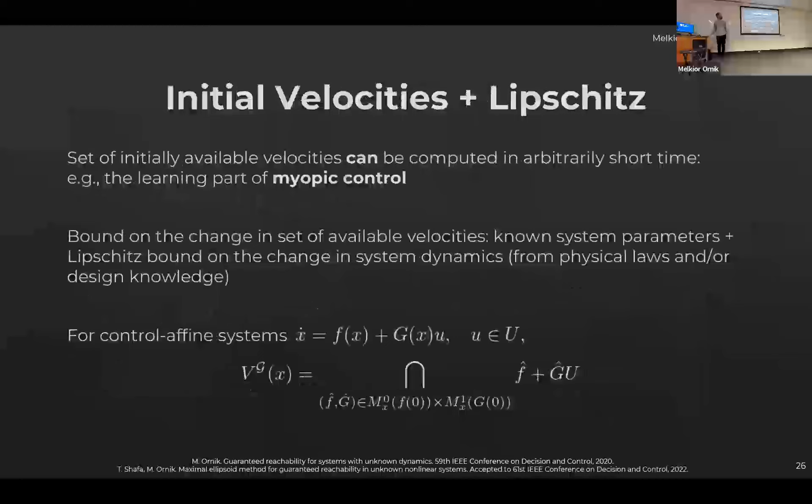I'm partially joking, but whatever question you're about to ask me, I fully agree that these are important questions. Oftentimes when your dynamics change, also your perception model changes in some way. You will get different, poor, incomplete observations, and you'll have to deal with all of that. I think that's really interesting theoretically and in practice. I want to say this big idea of figuring out the guaranteed velocities or guaranteed reachability still holds, but how to actually implement...